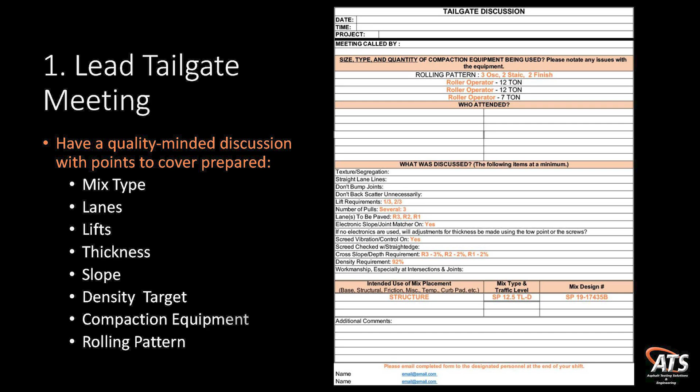So let's talk about these 7 things. Well, I'll spend a little time on this one. This is a lead tailgate meeting. Now we always have these. You get together before you're going to pave. It's usually like a safety meeting or something your company's required, where you gather around and you talk about what you're going to do tonight.

Well, at Duval Asphalt and ATS, we had to take it a step further because we were messing up. I mean, we were messing up. And from the top of this page to the bottom, it's even longer now because we still messed up, and we had to expand it since I made this presentation. But it's simple, it's documented, and then it's emailed in every night. As soon as that tailgate meeting's done, it goes to me, the QC manager, goes to our vice president of our company, goes to the project manager of that project they're on and everything.

And the things we talk about are things that we were doing wrong. Right up top is rolling equipment. We would show up on a job at night and the wrong compaction equipment would be there. For whatever reason, the transports would bring in the wrong compaction equipment or the wrong paver or whatever, and it was just ridiculous. So we'd try to pave with it. Now we're at the point where if we got the wrong compaction equipment, we're not going to pave because we've got to get density. We always mark in there who attended,

and then we start getting into the nitty-gritty of it. We talk about stuff like texture and segregation. We remind ourselves, hey, we're not going to fold the wings on the paver because we don't want to have segregation tonight. We need straight lines. We're going to match this joint again tomorrow night when we come back through here, so we need a nice straight line joint so we get good compaction on that joint. Seal it up. Talk about backscatter and mix on the mat. We're not going to do that, and I'll get into why in a little bit. Lift requirements, number of pulls, all this stuff that we were messing up.

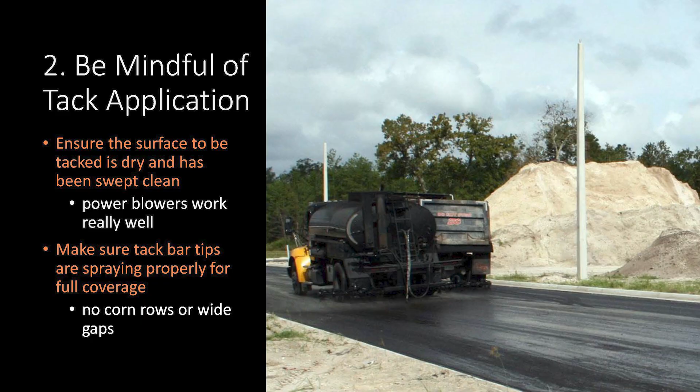All right, so let's go on from the tailgate meeting and talk about tack. Y'all in an emulsion state, South Carolina? Y'all use emulsion or straight AC? Emulsions? So you need to ensure that surface is tacked and dry and swept clean. We use power blowers a lot, either drag them behind a little John Deere Gator or whatever they call them, the ones that rotate, backpack blowers, all that, getting it clean.

Make sure the tack bar tips are spraying properly for full coverage, no cornrows or wide gaps. Tack is very important. We got to get density, and if you don't have tack on there, you're not going to get density. You may get a little bit, but you're not going to get what you want, and it's not going to be consistent across the mat and longitudinally down the mat as you go. Tack's a very important part.

And we had a lot of issues with it in Florida. Tack used to be a pay item, and they took it out and they included it in the price of the bitumen. So everybody just all of a sudden forgot about tack. And then we had a bunch of slipping issues everywhere. And it was never the fault of the product. We'd take the product and test it. It was always, it wasn't tacked right. It was either a dirty surface, they didn't get enough tack down, they missed spots or whatever. Every time it slipped, it was a fault of the people putting the tack down or allowing someone to pave on it.

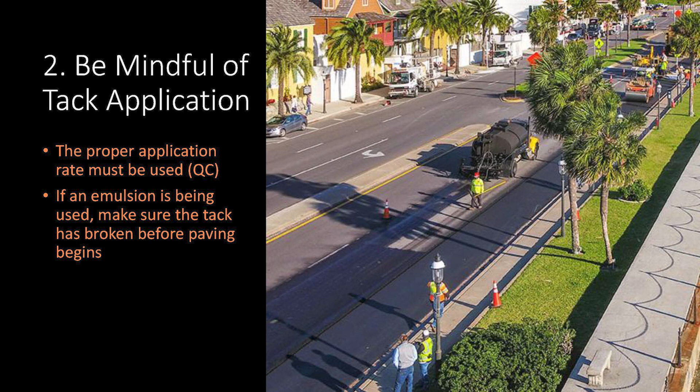Make sure you're using the right application. I know in Florida we use the emulsified rate, so it's with the water in there. Some of them take the water equation out and go with just the asphalt residual that's left, but ours is the emulsified rate. And you need to make sure it's broke. So that emulsion needs to break.

What was happening to us is when you first start out and you get a heavy tack shot right at that joint, and it thins out, well, past that starting joint, everything's breaking fine, but it just takes a long time back up here at this joint to break. People get impatient. Well, it's broke down there, let's go. Lo and behold, what happens? That joint slips. Especially if you're in a turning radius or stop and start situation or something like that. You got to let that tack break.

We pave a lot at night, and it takes longer for it to break at night, especially it gets humid in Florida at night, and that humidity takes forever. If it gets hot and dry, it'll break real quick. So make sure that stuff's broke. Make sure you get that application right as well.

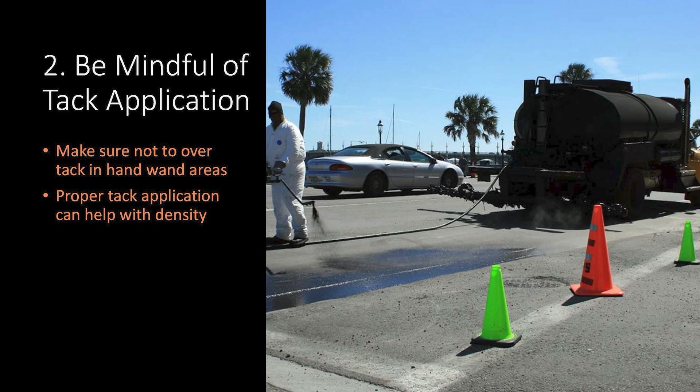Tacking with a hand wand. A lot of times, you can't get the truck back in there, so you tack it with that hand wand. You need to be real careful of this. You don't want to over tack. If you over tack it, number one, it's going to take forever to break. And if you get too much in there, that asphalt is going to wick up in there and make a fat spot in the mat. It's not going to look good. DOT is going to ask you to take it up.

But mostly the issues come when we hand wand, we get it too heavy, it takes forever to break, we get impatient, we pave on it, and we get a slipping issue. Tack's very important. It's how we get density. Is anybody familiar? Is it a separate pay item in South Carolina? They pay for it separate? No, it's in the price of the mix, bitumen. So yeah, that's what they did in Florida.

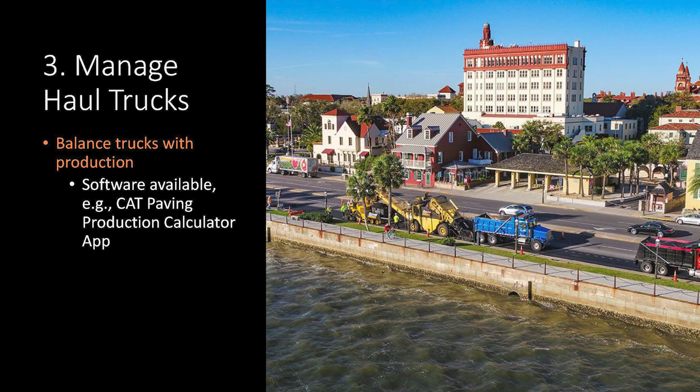Let's talk a little bit about the haul trucks. Effective pavers always had the right amount of trucks so they could keep going down the road. Kind of hard these days, maybe impossible because of the trucking situation, at least down our way. But we need to manage our paving to the amount of trucks we can get. Because the idea, if you were in here for my first session about plant mix, if I can run at 220 tons an hour in that plant all day, I'm going to make great mix because I can just keep going. Paving's the same way.

You don't put the trucks in there, but it gives you all kinds of information that tells you how many trucks you need. And I think it over-trucks it a little bit. You can figure that out, so maybe back down a truck, but still. The idea: get enough trucks so you can keep going down the road. Keep those trucks off of the paver.

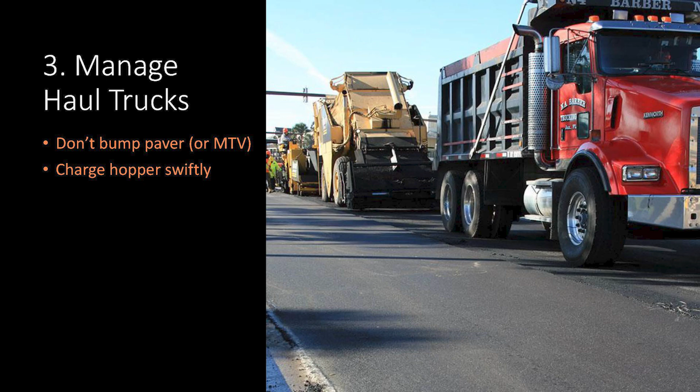Effective pavers, they don't let those trucks back into the paver. So when those trucks are backing down, you got a good dump man. Need a good dump man, and he's got a lot on his plate because he's taking tickets and all that, but he's going to stop that truck short, and we're going to use that paver to pick that truck up and go down the road.

Reason being, if we back that truck up, hit the paver, you're going to have a bump in the mat every time. And if you're in a laser profilograph state or rolling straight edge state, it's going to show up. It's going to be a ding. You're going to go out there and you're going to have to mill it up if it's too bad. 100-foot patch, I don't know if that's what y'all do here in South Carolina. They make us go 50 feet either side of the deficiency and mill it up. They don't care if you're putting 2 joints in there. They want that bump out.

You want to charge the hopper swiftly. This helps with segregation. I've seen a lot of them do it. They back that truck down. They stop short. The paver picks them up. They start raising that bed, and that mix shifts a little bit, and they pop the tailgate and boom, flood that hopper right in there.

If I raise it up, keep going slowly, got my gate up, and start trickling that mix out, it's going to segregate. The larger stone, aggregate, rock, whatever you want to call it, it's going to beat the fine rock down. It's going to be segregated in that hopper, and it's going to show up in that mat. Charge the hopper swiftly.

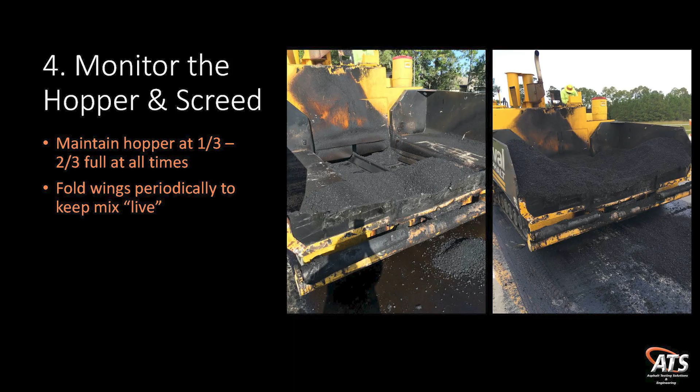So what about the hopper and the screed? Like I was talking earlier, this has to do with segregation. End of load segregation. I don't know if y'all have that issue in South Carolina. We had it real bad in Florida, and the Florida DOT wrote the perfect spec, and it will kick your butt if you have end of load segregation, because you're not going to get out of it.

It's a quantifying spec. You have end of load segregation, they make you go cut cores in it, because that segregated area, trust me, I've seen it too many times, it does not have density in it. And if it doesn't have density, you got to mill and replace it. One of the toughest specs I've ever seen.

Maintain the hopper 1/3 to 2/3 full at all times. So that one on the left, I don't know if you can see that real well, but you can see your slat conveyor showing. You do not want it to look like that. You always want mix in that hopper as you're coming down with the next truck. You never want to go towards that truck with your paver, empty those wings from the side with those slat conveyors showing. Because that mix that's sitting on the outside as we're paving that truck out, it's getting cold, right?

Now it doesn't flow as good. If we dump that down on those empty slat conveyors and it gets drug back there to that auger, it's not going down that auger because it's cold. That oil, liquid AC, has become cold. So it's going to hit that kickback paddle right there, and it's going to look like a chevron mark as you go down the road.

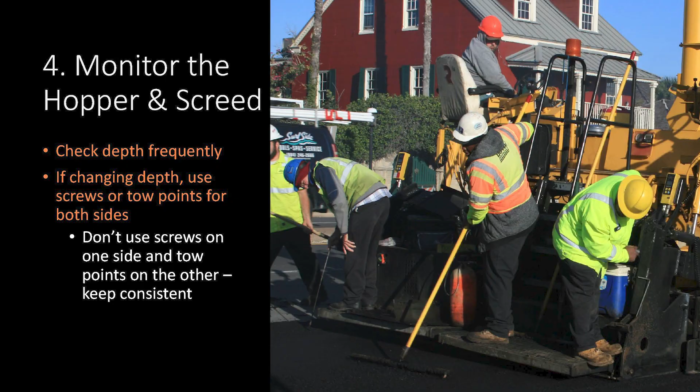So we want to check the depth frequently of our mat. Use your depth sticks. Make sure we're hitting that grade. It's great, we got all these electronics on there, but nothing beats that stick right there with our fluff built in there, 1/4 inch per inch, and checking it and making sure we're getting our depths.

So we got to change the depth. The Cat guy, I listened to him this morning. He talked about it. There's 2 ways to change the depth on there. You can use the tow points, or you can use the jack screws. You see those guys screwing back there? What you don't want to do is one guy using the tow point and one guy using the screw, because they don't adjust exactly the same. So we can get off. More importantly, we can warp our screed, and we've done that. We've warped some screeds, and it's pretty expensive when you warp a screed. So just keep that in mind.

Effective pavers, they tell their guys, and it's on that checklist: what are we going to use tonight? If we're not using electronics, what are we going to use? Use a tow point, or we're going to use the screws. Using electronics, it does it for you. And guess what? Electronics go off the tow points. They move the tow point. They can't turn the screws. So it tells me that those tow points are probably better managing your depth, adjusting that angle of attack.

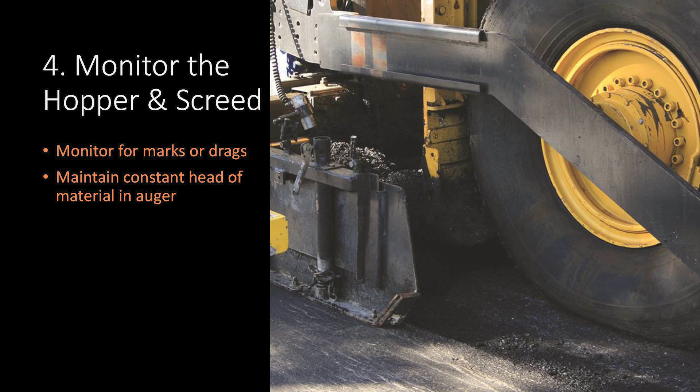Monitor for marks or drags. Nothing in the world worse than something getting caught in the screed and you drag it down that brand new mat and everybody's looking this way, nobody's looking that way, and you go 100 feet down the road with a big old clinker out of the plant in there and just dragging it up the middle of the mat. Now you got to fix it. Now you got a bunch of handwork. Now you got a deficiency in the mat.

You might not pass laser profilograph, might not pass rolling straight edge. DOT might say it's segregated. Cut some density cores in there. Well, we put it back in by hand. We rolled it in, but we got density, so just be careful. Someone should always be looking behind that screed.

Maintain a constant head of material in the auger. If you were here for the Cat guy before, he said halfway up that auger. You want to maintain that head of material halfway up that auger at all times. A little bit above it's okay. Never want to drop it down. You never want to get real high. You're going to change your angle of attack. It's not going to be good. Keep it constant, calm. Just like constant paving, everything constant.

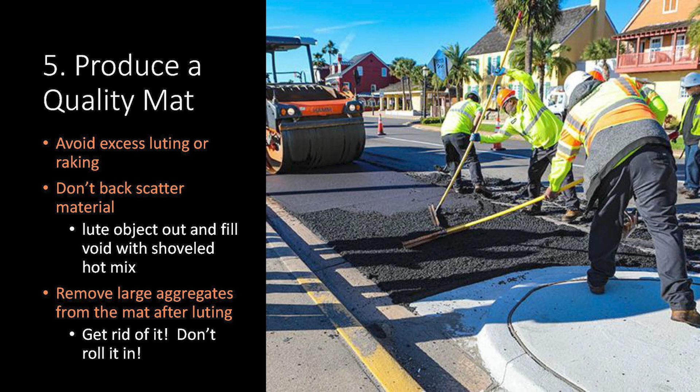Produce a quality mat. Avoid excess luting or raking. Well, sometimes it's hard, but in that tailgate meeting or before we get there, we can talk about it. Hey, we got some handwork coming up here. How are we going to attack this with the paver? How much are we going to leave behind? Who's going to do the luting? Who's going to do the shoveling? Let's make sure we get it done quick. Try to avoid it as best we can.

This is the same picture. That's in St. Augustine. That's with that mix I was talking about, 2.5% air void mix. With that Stellar Flex, that's some stiff stuff right there. And actually, I looked at that a couple weeks ago, and it still looks okay. We had some guys did some real good luting right there.

So I talked about backscattering before. If we correct a place in the mat, what we should do is we take that lute, we turn it up on end, and we dig whatever's in there. We bring a shovel all the way back there, and we put the shovel in there, and we rake it out. I see it so many times where the shovel man is up by the screed, and he just chunks it, and it just goes cast all the way across the mat. Well, what happens is we come through with that roller, and those big rocks that are sitting on top, we roll them right into that mat, and then it looks like segregation.

Untrained eye, we get inspectors or DOT or just anybody: this looks terrible, it don't look like the rest of the mat, you must have segregation, we want it removed off our job. Especially if you're doing private customer paving in parking lots, they're all about aesthetics in a parking lot. So if you're constantly casting material everywhere... I pulled up on a job one time and this dude, he's just casting. I'm like, why are you doing that? He goes, I'm shoveling, man. I'm shoveling asphalt. Okay, that's what they told me to do.

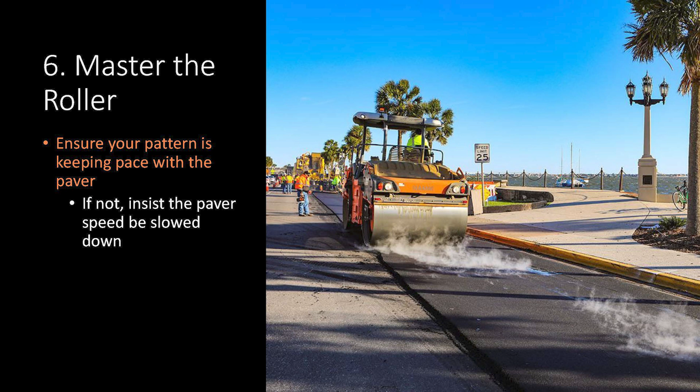So what about this roller? Very important part of paving, right? Because we got to get density. So ensure your pattern is keeping pace with the paver. That's a trick. We want to make sure that the paver is keeping pace with the roller. The roller is going to set the pace of paving because you got to get density. If the paver's running off and leaving the roller, you're in trouble. Because in between where that roller's rolling and where that paver's placing, that mix is cooling down.

And what do I need? I need constant temperature to get compaction on my mix. The rolling pattern sets the paving pace. Hey, we might be struggling with a mix, you know. Something happened at the plant, we haven't got it adjusted out, we're struggling getting density. We got to slow everything down. We might have to put a couple more passes on here. You have to insist to slow the paver down so we can get density. Density is everything.

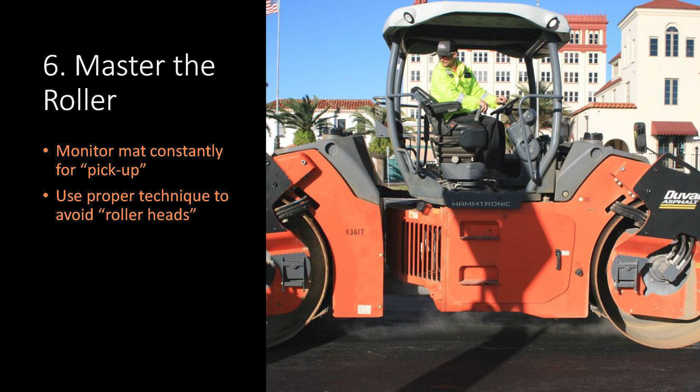Roller guys, they want to monitor that mat constantly for picking up. That roller picks up something on his drum, and every time it turns all the way around, we give it a little mark in the mat. Boom. And before you know it, we got that mark all the way down the mat. Is it bad? Looks bad. Could be bad. I've never really seen any of them ravel out, but it looks bad. Brings attention to your job, negative attention that you don't want.

Use proper techniques to avoid roller heads. There's a way that we roll out there. When we are going to stop and go back the other way, we turn it at an angle. We back up and go again. For some reason, when we push that mix up, turn it at an angle, when we hit it going straight, it'll roll that roller head right out. But if we come up and leave it square and go back, we'll never get it out unless you get on it and cross roll it. I don't know, asphalt's just that way. So be mindful of those roller heads.

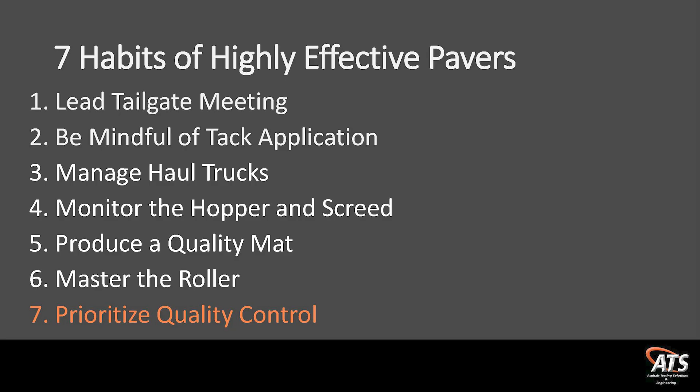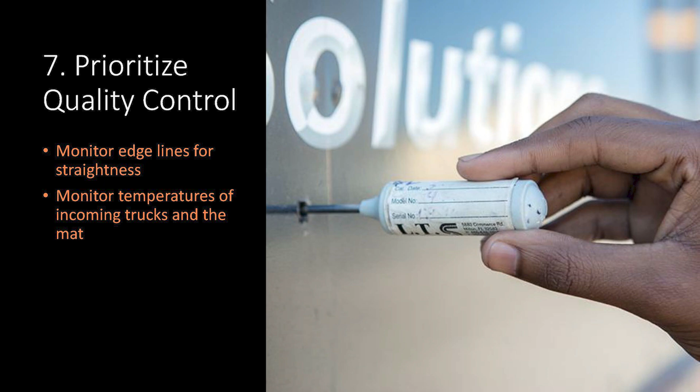So let's talk a little bit about quality control. Again, edge lines. I think it's just my pet peeve. I hate when people pave crooked. I was coming up here the other day. I don't know if I was in Georgia or South Carolina, but I seen some center line joints that were doing this. Do you think that we have good compaction on those joints when they're going like this? Do you think we've married those joints up real good? I don't think so. I think them seams are going to come apart probably long before the pavement fails. That's just my opinion. It looks terrible. It's just me probably though.

But if you're on an airport, they make you cut them back, right? So there's got to be something to it. You cut back them joints and they're straight, and you spray tack on that vertical face, and then they make you cut density cores on it. So got to be something to it. It's got to be straight in order to work right.

So monitor temperatures of the incoming trucks and the mat. So like if you were here for my production side of it, temperature's everything. Out on the road, temperature's everything. We need consistent temperature within 10 degrees of the mix design temperature or compaction temperature. We need every one of those trucks like that, and we need to monitor that. We have a spec in Florida. We monitor the first 5 trucks. They got to average within 15 degrees of the mix design temperature, and then every 5th truck thereafter we take a temperature, and they got to be within 20 degrees. So it's pretty strict, but Superpave works at temperature.

Years ago, I went through that research thing with the State Materials Office, and we called it SWAT, Superpave works at temperature. And basically what we did is we had nuke gauges. We didn't have those fancy PQIs then. You had a nuke gauge, and you make a pass with the roller and you take a reading of your density. Make a pass, you roll and read your density. At the same time, you're taking a temperature. And you'll see as that temperature falls off, that density will fall off. You won't get as much density, so it means everything.

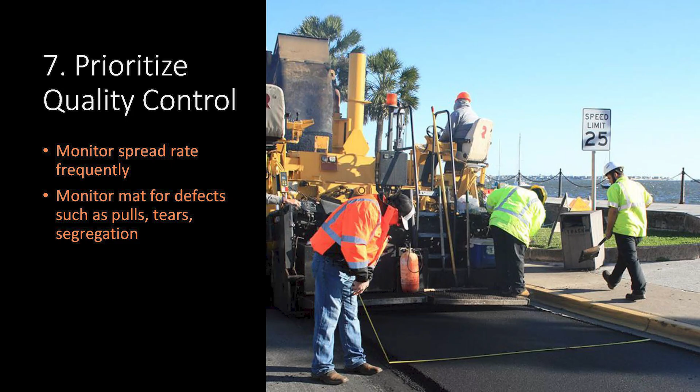Monitor the spread rate frequently. So the screed guys are hitting it with their stick, making sure they're getting it. Your QC guys need to be monitoring those spread rates. We do it every 100 tons. So every 5 trucks, we give the paving foreman a spread rate. Make sure he's putting down the right thickness. Every 100 tons. It's a lot of work, but they do it.

Monitor the mat for defects such as pulls, tears, and segregation. He's back there. He's doing his spread rates. You might as well look at the mat, make sure we're not pulling, tearing, or segregating the mix.

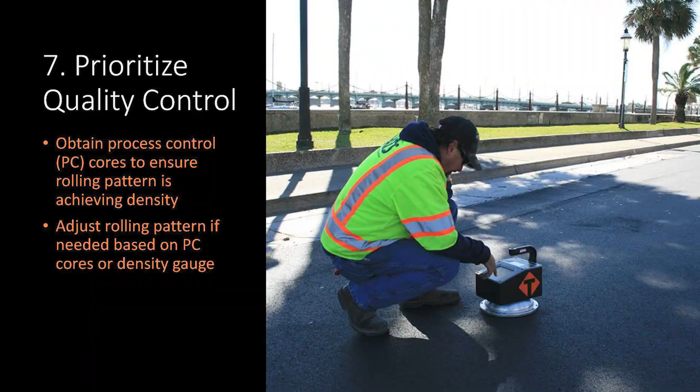So what about that density? We have a lot of success in our density, and here's what we do. And I've learned this from people who had successful density. We obtain process control cores to ensure our rolling pattern is achieving density every day or every night. The first thing we do, we lay 3 loads of mix, and we go pick 3 spots across the mat, and we cut a core.

We take a reading with our PQI, Pavement Quality Indicator, which is a non-nuke density gauge. Take a reading, take a temperature, cut a core, and put it on a truck and send it back to the lab, and they give us a Gmb on that core. We calculate our density and make sure our gauge is reading right.

Every single night. We might have paved there last night, same mix, same subsurface that we're paving on, everything, but we still do it every night. Something changes with the mix, we need to know, and you can tell quickly by cutting those process control cores and getting them back in there and see if we're getting density.

We're going to adjust the rolling pattern based on the PC cores, or if we have a lot of confidence in our density gauge, which we should. If we get a PC core and it's matching up with our gauge, or we put an offset in there that we know it can match, that's when we'll change the rolling pattern.

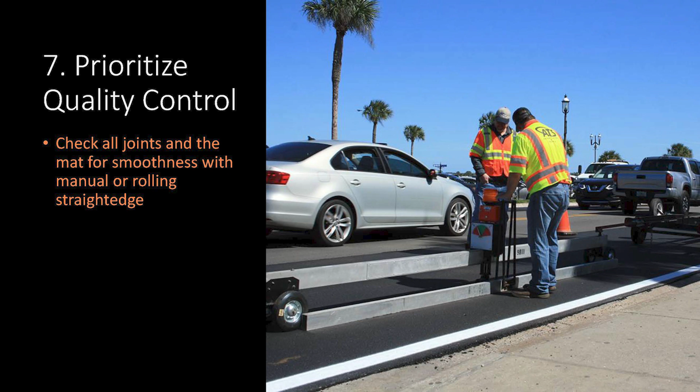Check all joints and mat for smoothness with a manual or rolling straight edge. So even if we have a laser profilograph job, we'll check every joint that we make with a manual straight edge, and then we rolling straight edge what we pave every day, even though they're coming back with a van. We just want to know that for us, it's smooth.

And I'm an old school guy. I like the rolling straight edge better than that fancy van. So you can see the gauge. Them vans, it's a mystery. Oh, we'll get back to you.

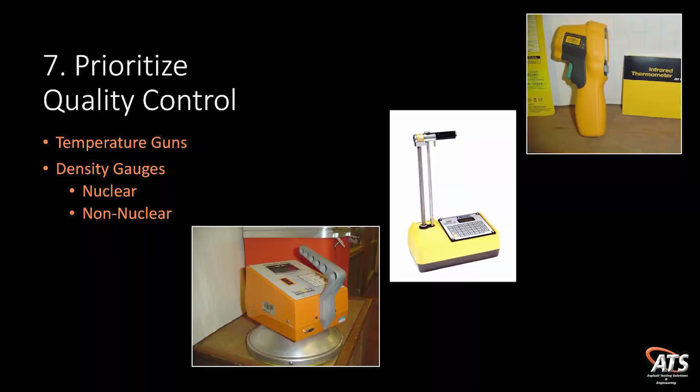So here's some of the tools. Up on the right, it's an infrared temperature gun. Those things used to be real expensive, but now you can get them at Lowe's and Home Depot. They don't need to be calibrated. Just need to give you an idea so you can look at that mat and make sure I got constant temperature, or the same temperature across that mat.

If I shoot 3 places across that mat and the middle of it's 50 degrees colder than the outside, I probably have a segregation issue. Quickest way to check that I have a segregation issue is with temperature, because it's open, it's porous, it's losing temperature faster than the two sides of the mat.

The other two is a nuclear gauge and a non-nuclear gauge, that pavement quality indicator on the bottom left that I was talking about. So that's what we use. I don't have a nuclear program. I don't do any soil testing, so I don't want all the trouble with keeping up with nuke stuff.

So successful paving needs total buy-in from everyone. Everyone meaning from upper management all the way through the organization. Praise loudly when deserved and provide constructive correction when needed. And like I said before, we need to tell our people that what we do is a big deal. We're building the infrastructure of the towns we live in. The people we know are driving these roads. Let's be proud of it.

It's our reputation on the line. If you build a bad road because you didn't pay attention to the quality or the maintenance of your equipment or your plant or anything like that, it's your own darn fault. But if we take the time, be proactive, pay attention to what we're doing, and be proud of what we're doing, then we can do it. We've proved it in Jacksonville that we can be successful, really successful.